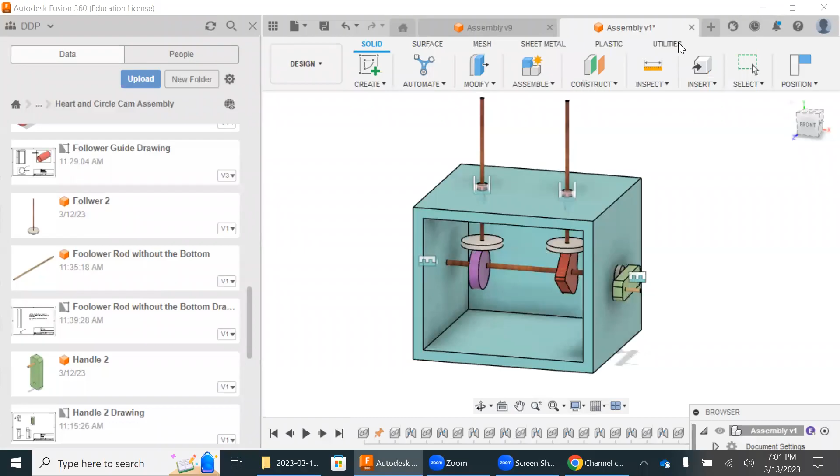Hello DDP students, so we're starting the CAD creation of our Automata box. This is the end result, this is my specific design, not yours, so yours is going to look different.

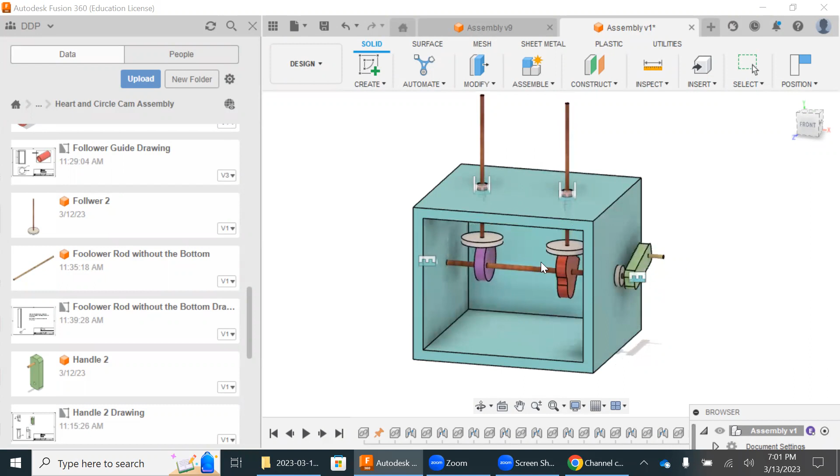The box itself is going to be unique to the physical box that you get in class. The handle, the rod, and the follower rods will mostly be the same, but there's going to be variations in your design. The bottom of the followers, maybe you want it square. We're going to be cutting it out of foam core, so I imagine it's either going to be round or square or something similar to this.

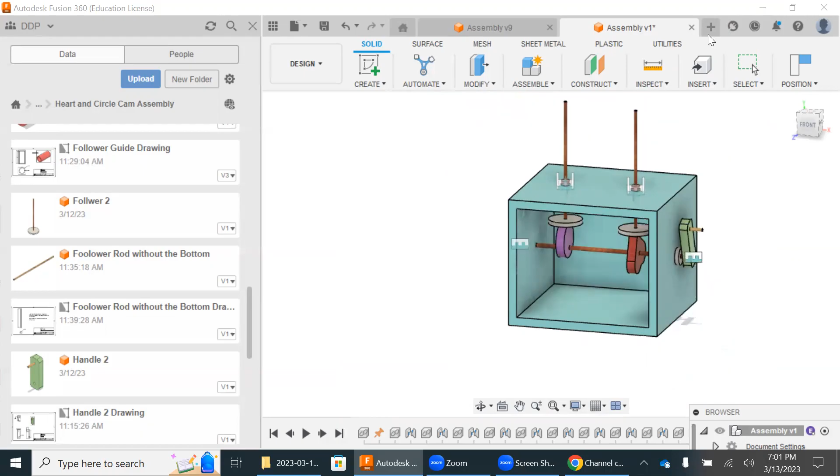But this lesson tutorial is going to be all about going through a couple of the parts and just assembling them. So when we do a part, we start a new design, we want to start it with a new component. We want to name the component. It's really important because we need it all right here as separate. We can't have anything in the same design unless it's an assembly design.

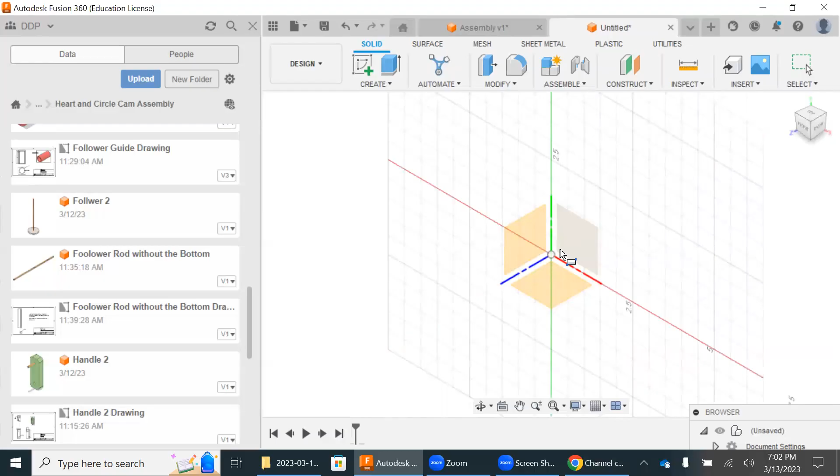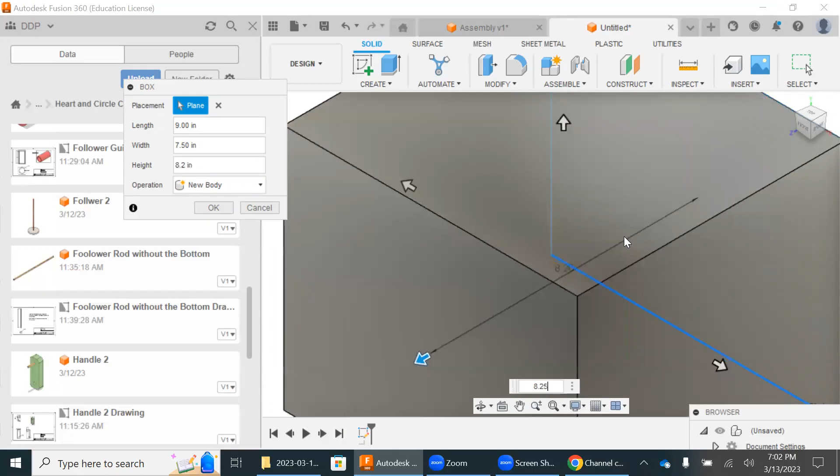So I'm going to start my box as a primitive. The exact dimensions of this is going to depend on the exact dimensions of your own personal box that you get in class. This I'm just making up, don't pay any attention to the dimensions, that's not what this is about.

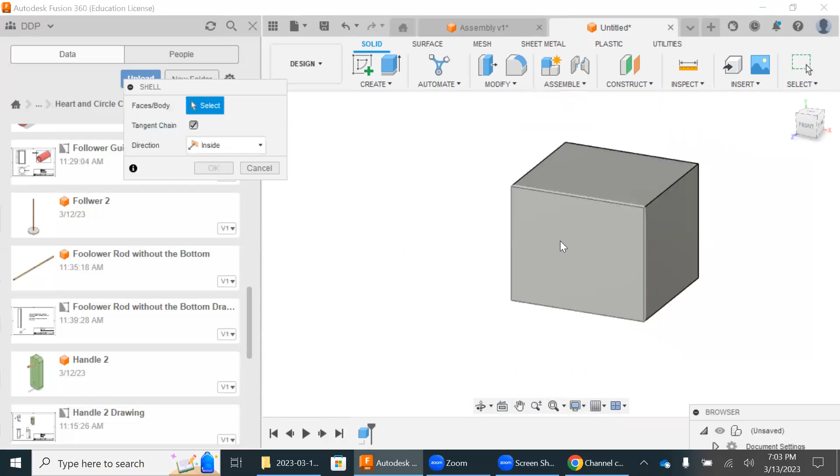But what we do want to pay attention to is that the front of the box is the front of the cube, and when we're looking at this it's going to be lined up. So what we want to do to the front of the box, we want to shell it. We're going to go to our shell, choose the front, and I'm going to choose 0.5.

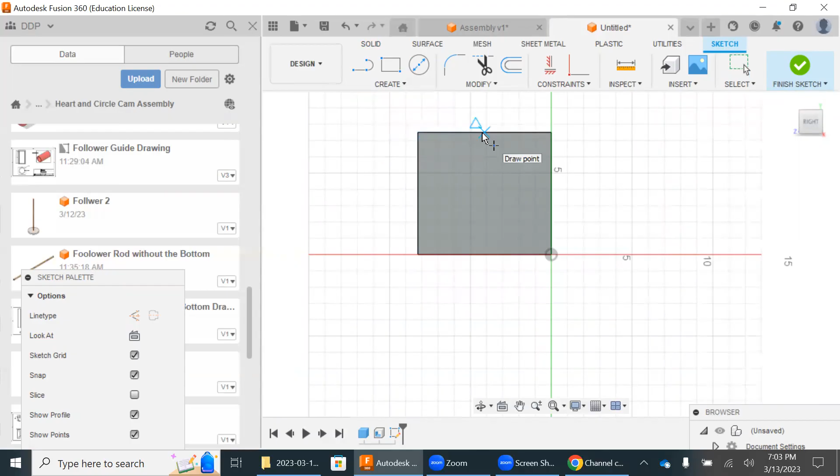Hit OK, and then I'm going to start to sketch some features. I know the axle rod that we're making is going to be 0.25. So I'm going to do my point here, and then that here, then that's the center right there. I'm going to just make a 0.25 circle.

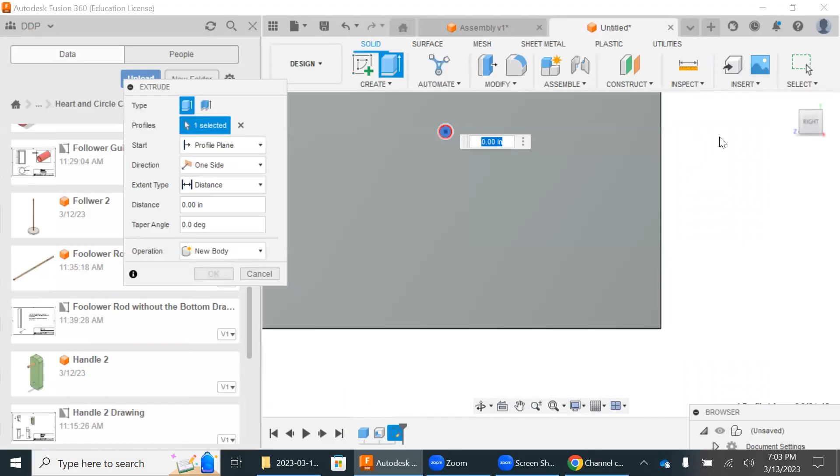I'm going to zoom in, finish the sketch, and we're going to extrude that inwards. But what we want to do is we want to change the distance to all, so it goes all the way through the box. Okay, and then we'll just hit OK. And now that's lined up, both sides are lined up, right?

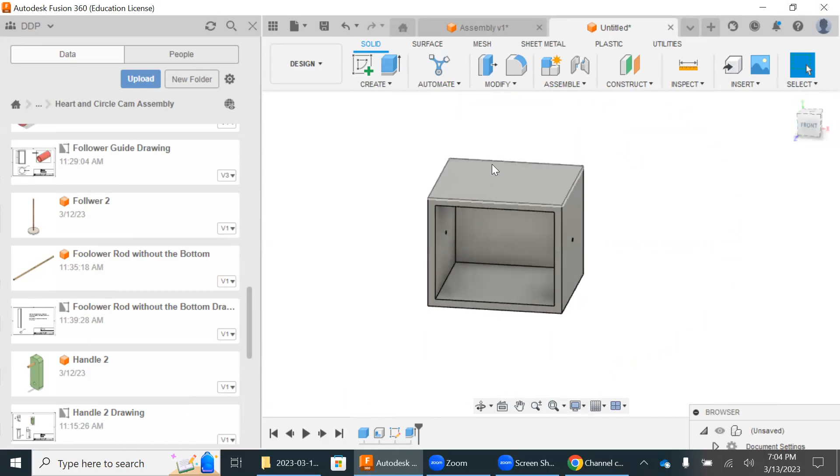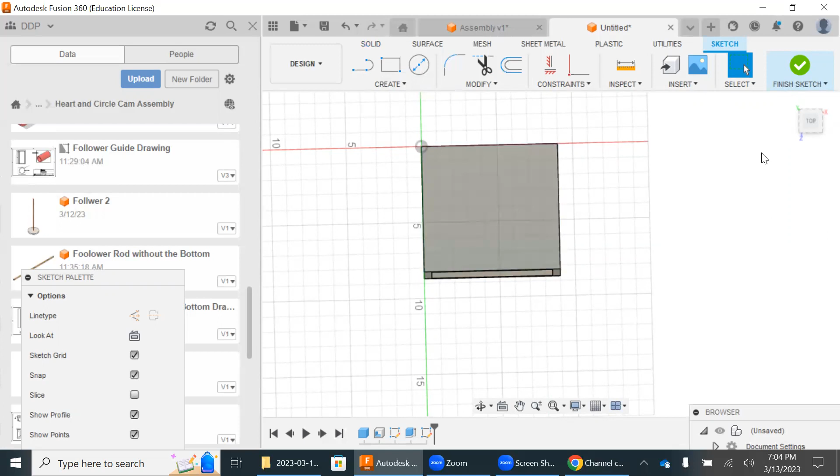So now what you should have done by now is you should have planned how many followers you want, how many cams. And given the dimensions of this, the longest side should be the top and the bottom, the front face and the back. So given that, you should have placed where your holes are going to be given those dimensions. If there's two, you want things evenly spaced out. However, you also want to calculate how big the cams are going to be, so when we're placing the holes we want to make sure the cams have enough room in the box and that they're somewhat equally spaced along the distance.

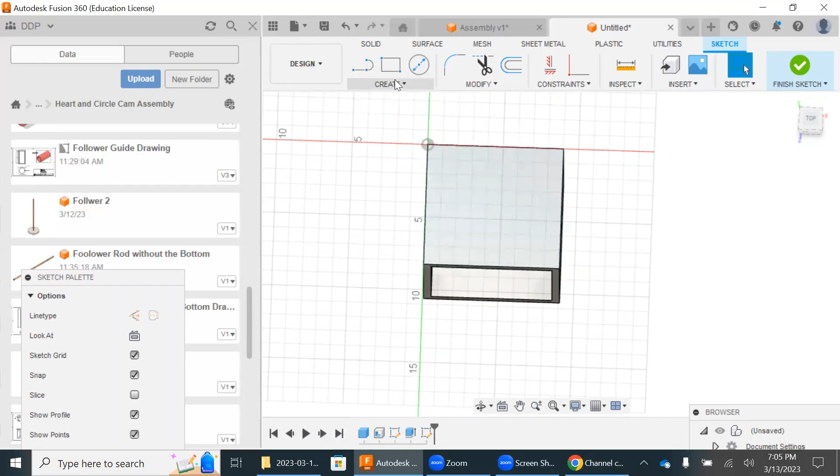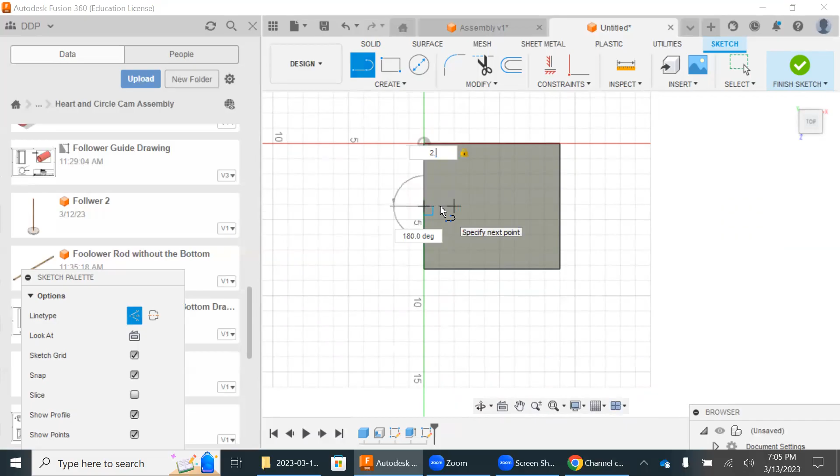So I know that this in particular is a 9 here, but having already worked this out ahead of time, let me just go to my top view. I know where I want my holes already. I'm going to go back to my point, and actually I'm going to go to my line, do my construction line, and I know what the exact distance is for me. Again, this is going to be different for you.

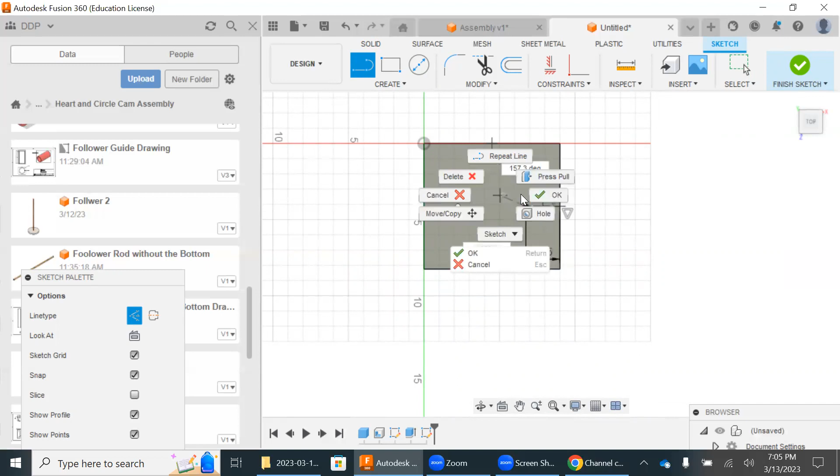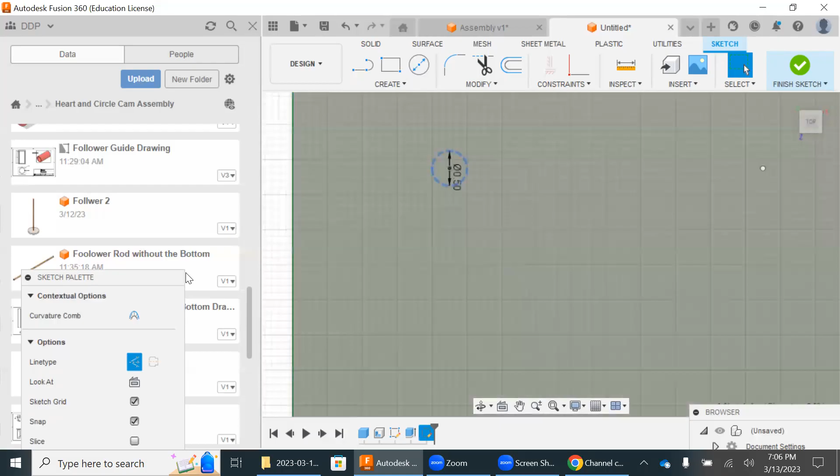Okay, I'm going to place my point there. I can get rid of that line now. I'm going to go back here, find the center point. Okay, I'm going to go here. This, for my design, these are going to be 0.5 circles. But what happened is they're still on the construction, so I'm going to highlight that and take that off. We're going to do the same thing here with construction lines. Then I'm going to finish the sketch and extrude both of these.

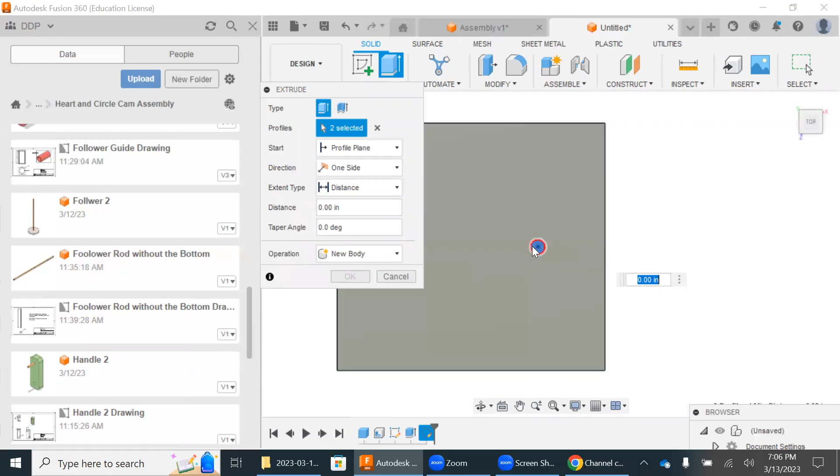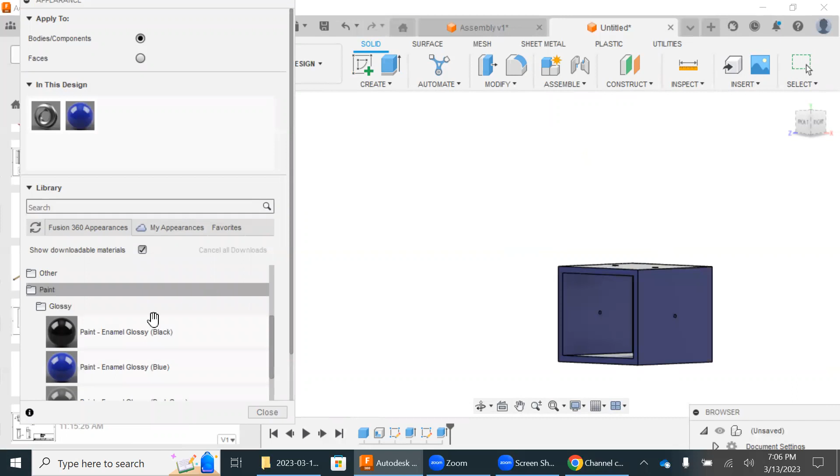And that's how we're going to make our box. And then if you want to give it a custom color, you can. So we're going to save that as box or whatever, and so it's there.

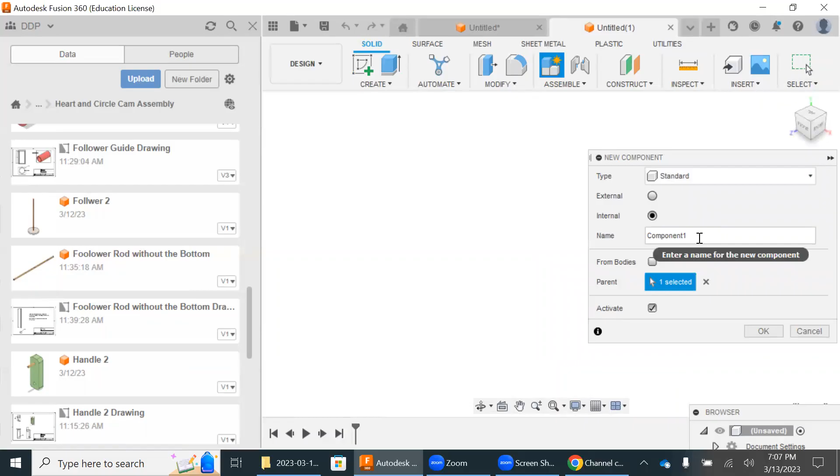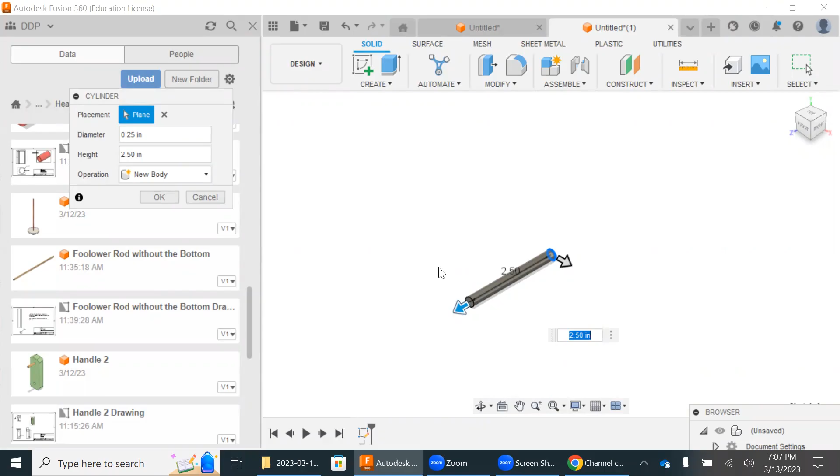All right, I'm just going to move on to my next one, the axle rod, which is going to have a diameter. I'm just going to go with my primitives here. So we know the diameter is going to be 0.25. The length of it, however, is going to be about an inch, inch and a half longer than the longest length of your box. So if mine was 9, then I would make mine, I don't know, 10.25 or 10 and a half, somewhere around there. It doesn't really matter, but it does matter that it's at least an inch and a quarter to an inch and a half longer than your longest side.

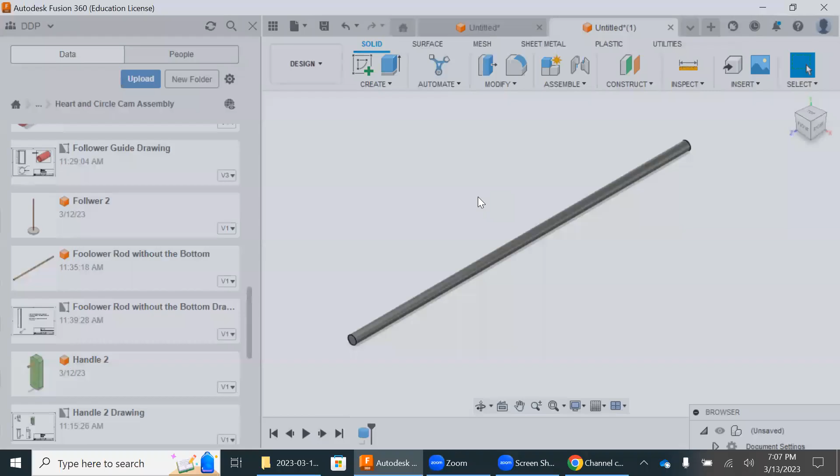So that's easy enough. We're also going to save that as axle rod. Save it, I'm just going to cancel it, but that's the idea. Moving on, our follower rod, we're going to create a new component.

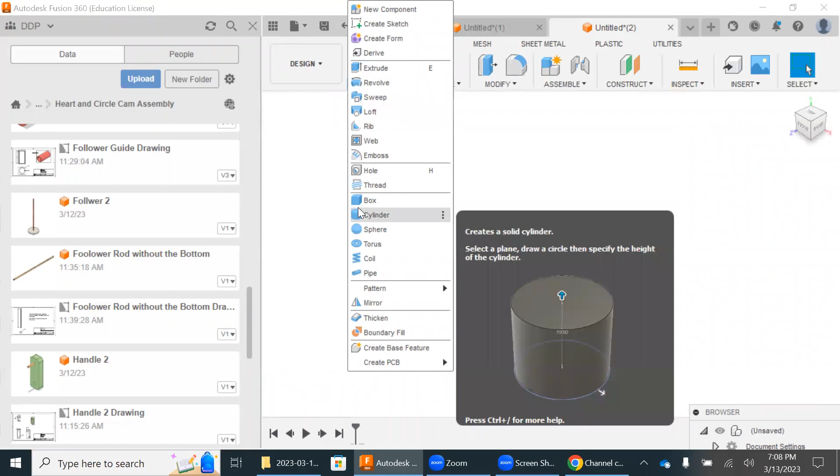This is going to be different. I'm going to do a 0.1875 for the diameter, and for this I'm going to do 7. I'm just making all of the rods, the follower rod, 7.

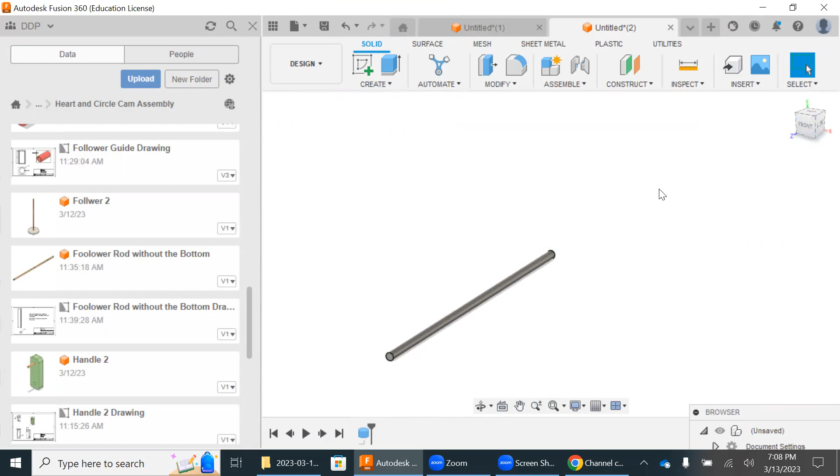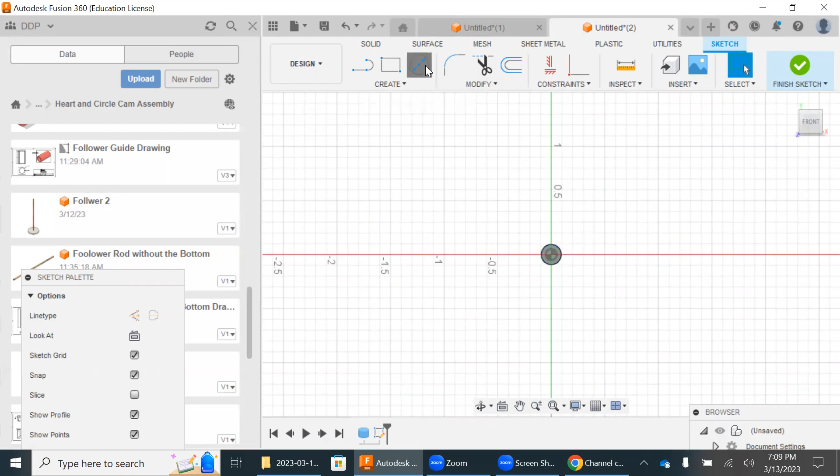Once you do that and you've planned what the bottom looks like, it could be square, rectangle, oval, you want to figure out how wide your follower bottom should be. This has to do with the amount of space that's in your box and how many cams you have. So let's just say you have 5 cams and a very limited amount of space and they're crammed together, you want the diameter of these to be small enough where they all fit.

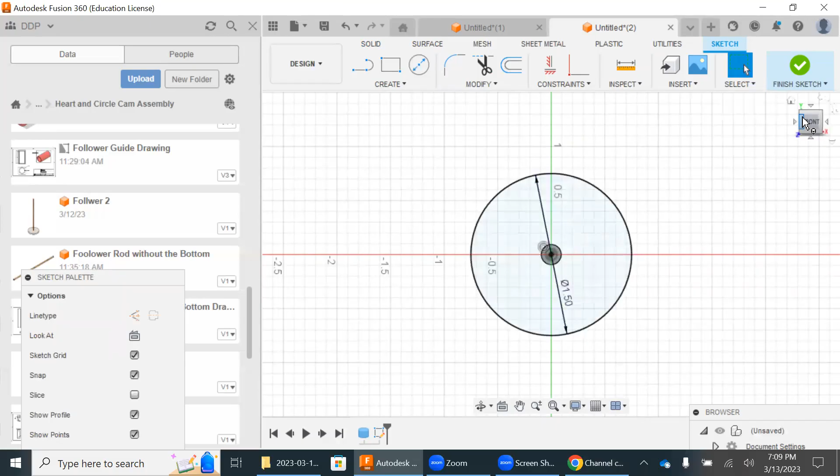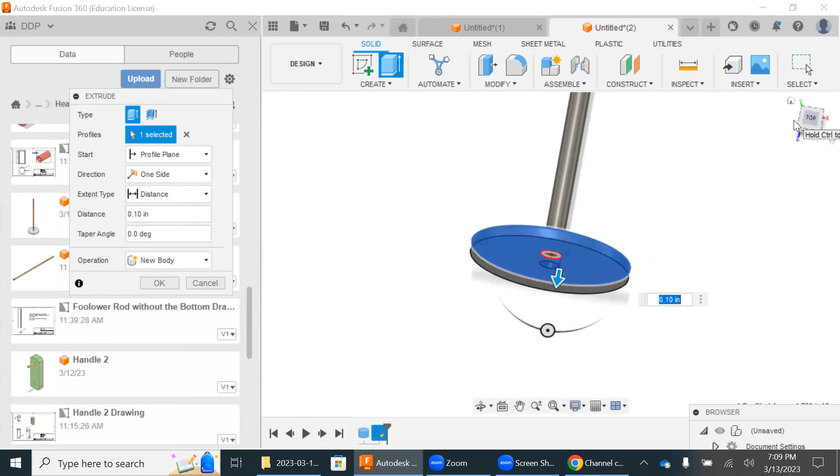However, if you have 2 cams and let's say 9 inches, these could be 2, 3 inches, something like that. Let's just say this is 2-inch—we'll even go 1.5. The bottom of this, I left it without a bottom in the instructions because you need to figure out the diameter of the bottom of the follower. Once you have the diameter figured out, we can extrude that down. I'm going to do a 0.10.

Now, if we want to change the physical appearance, let's see what we got here. There's something I'm going to change it to—there's misc here and there's paper. I like that for this. Then I'm going to close this and go to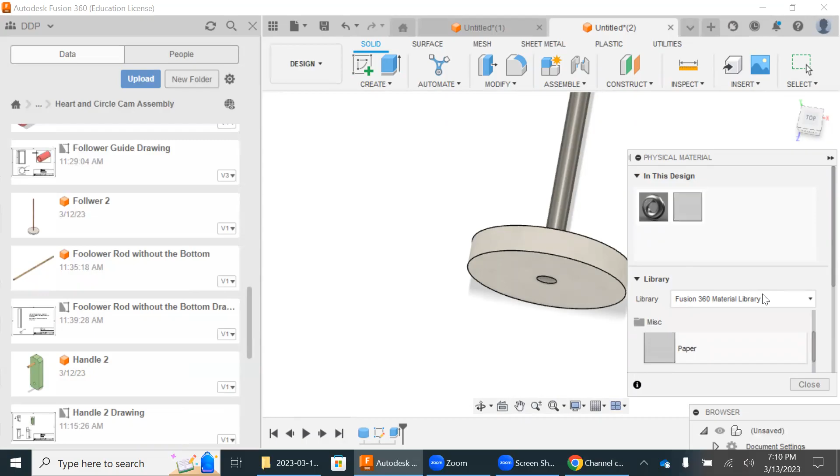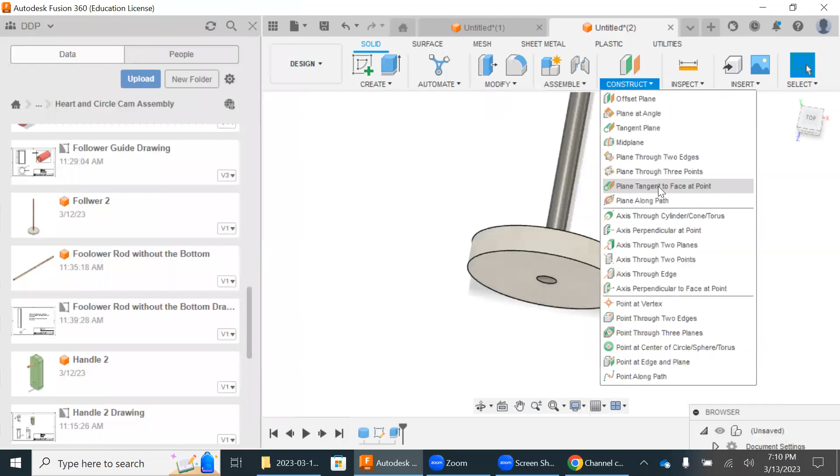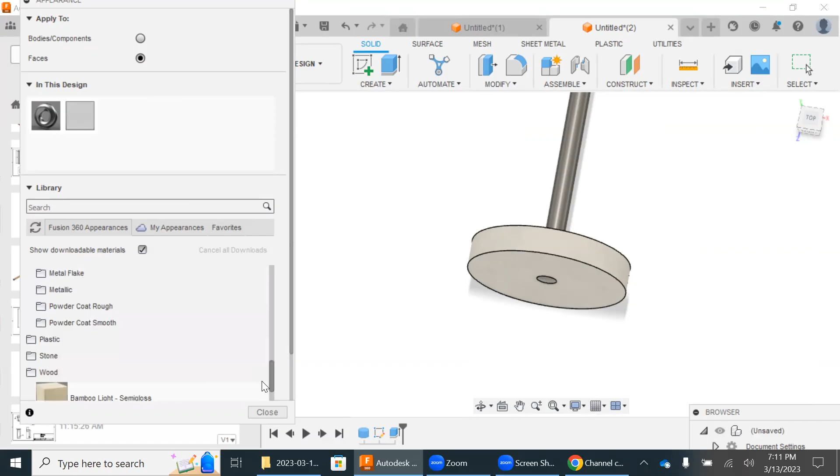I think it's appearance. Here I'm going to find my wood. The wood in this menu allows you to apply it to faces. Let me see if I can do that up here. I'm going to close this—let me see. Let me see if I can find this real quick. Do physical materials—nope, not that one. We're going to go to appearance again. Okay, faces, this is what we want. Cool, so we're going to find our wood and we'll just throw this on there.

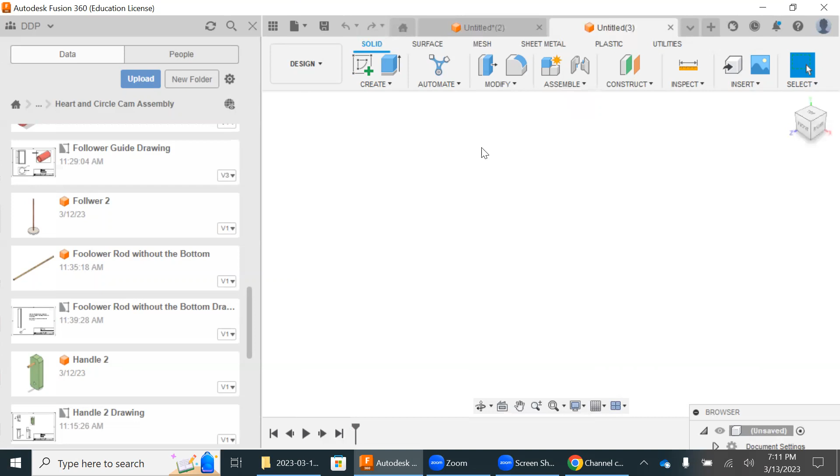Good enough, so we're going to save that as our follower. Cancel that to start a new design. So our handle here, we're going to start a new component—we'll call it crank or handle, or whatever. We're going to hit OK. I'm going to create—I'm going to start this as a sketch.

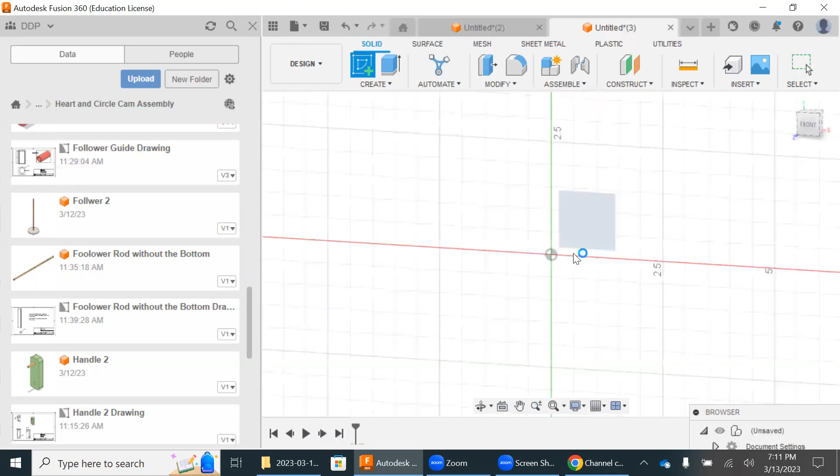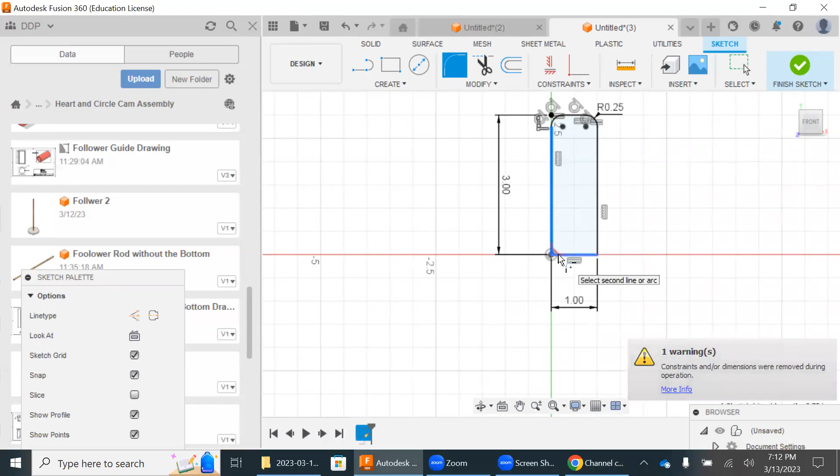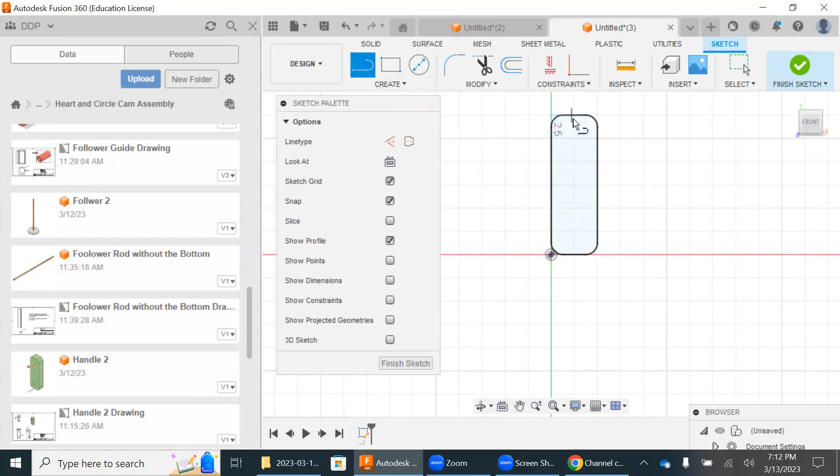I'm going to do a 3x1. Then I'm going to go to my fillet, I'm going to do 0.25, do each of these. Let me get rid of some of this clutter here—constraints, projected points, all that stuff, even get rid of the dimensions. So I'm going to now just go down the center here. I'm going to do a construction line, I'm going to do 0.75 about there.

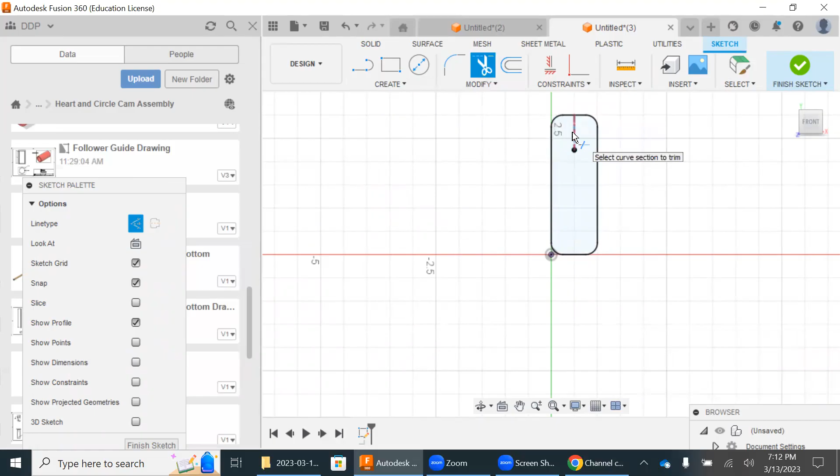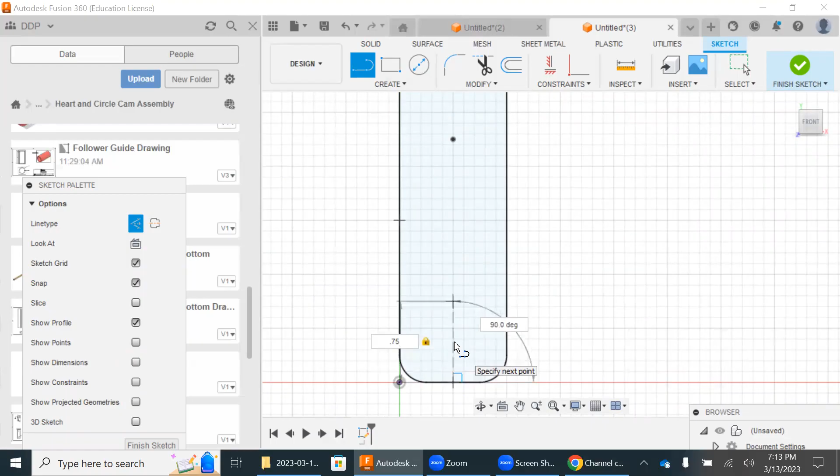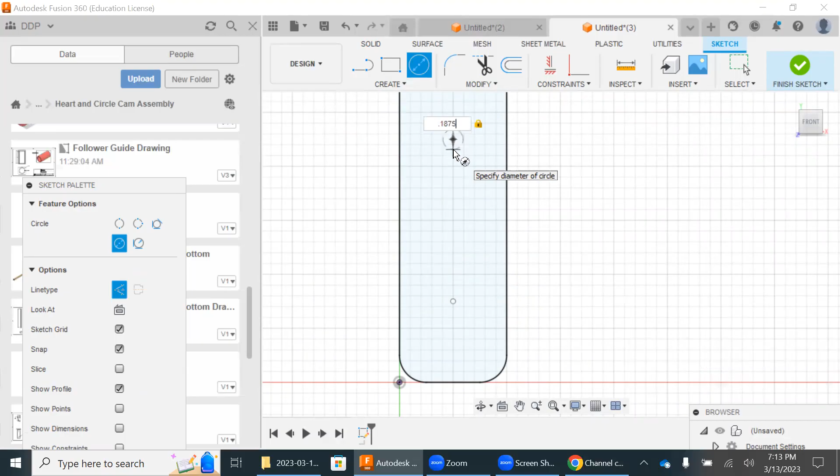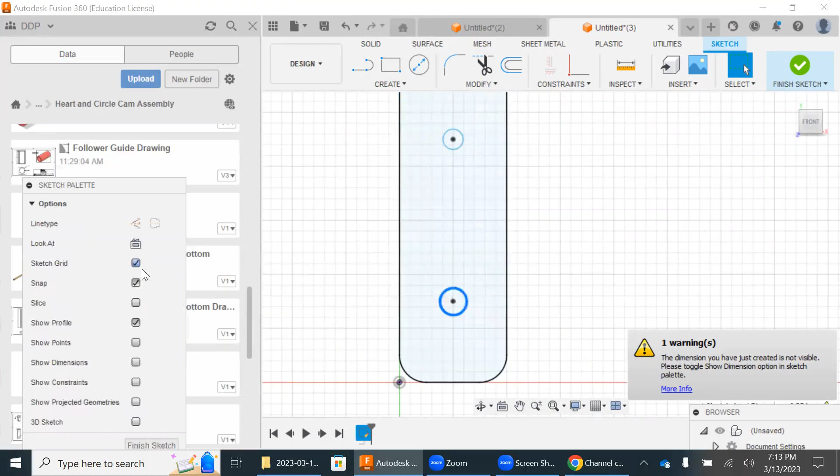I'm going to set a point. This is going to be 0.1875. Then I'm going to do a construction line in the center, 75. Let me make sure I did a hole here—okay cool, there it is. But we're going to change that from construction to a solid line. Now this is going to be the diameter of the axle rod. Now let's finish sketch, extrude this, and I want the handle, just like the cams, to be 0.5.

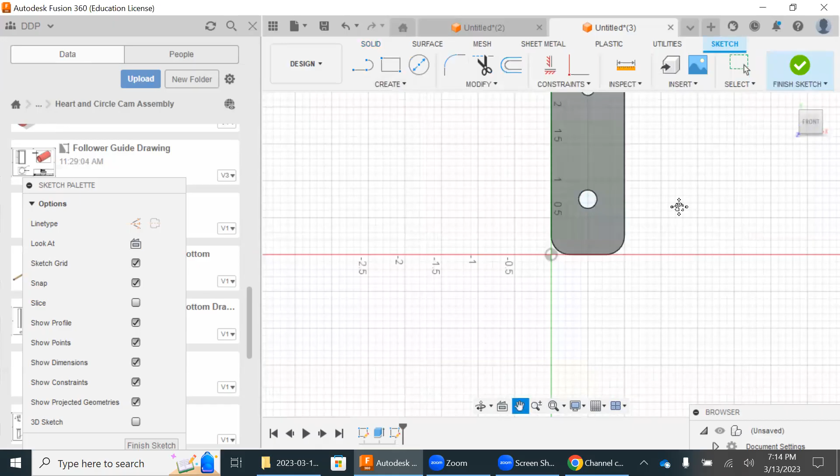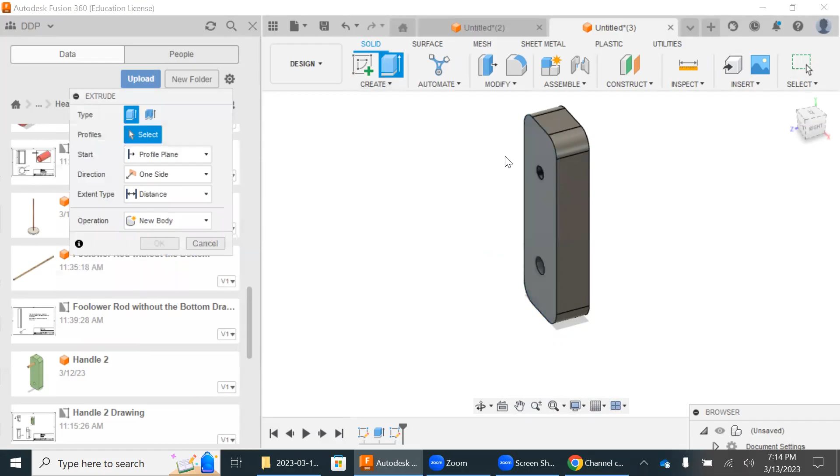Now we're going to start a sketch on this face. Point 1875. Oops, that's not what I wanted, I'm just going to cancel that. And I think this should go out 75. Cool, and that's how we make our handle.

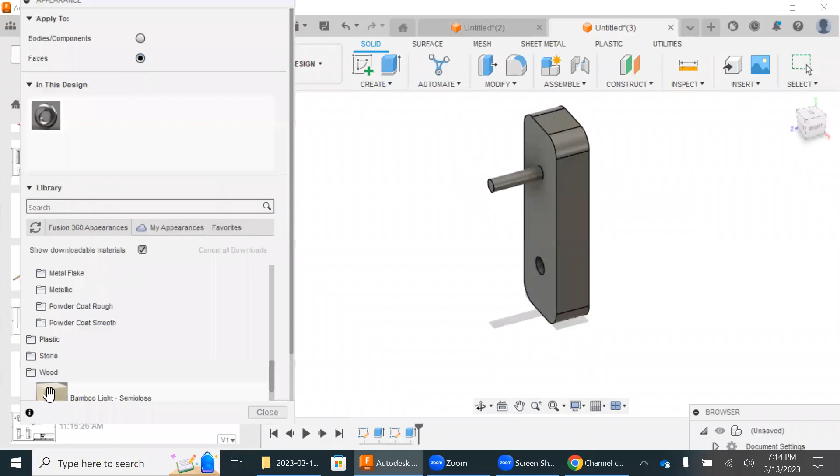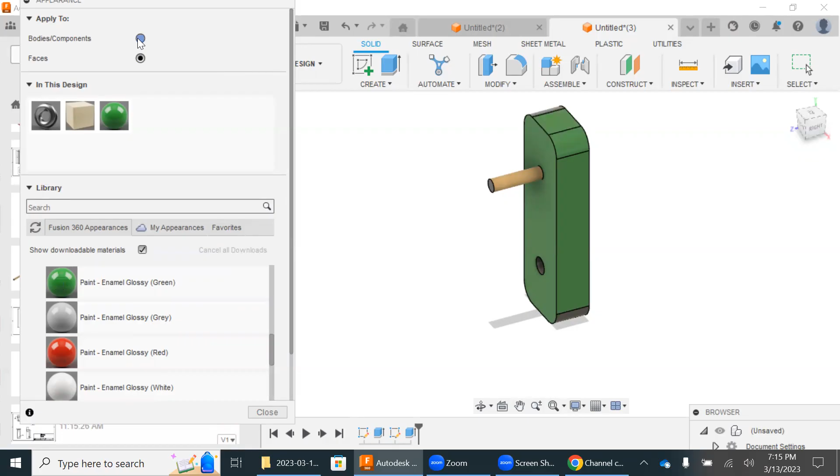Okay, and then we're going to just change the appearance of that. I want this to be—yeah, we'll just do it on everything here. Let's just see if I can just put it to this. Okay, there we go. Cool, so then we're going to save that as handle.

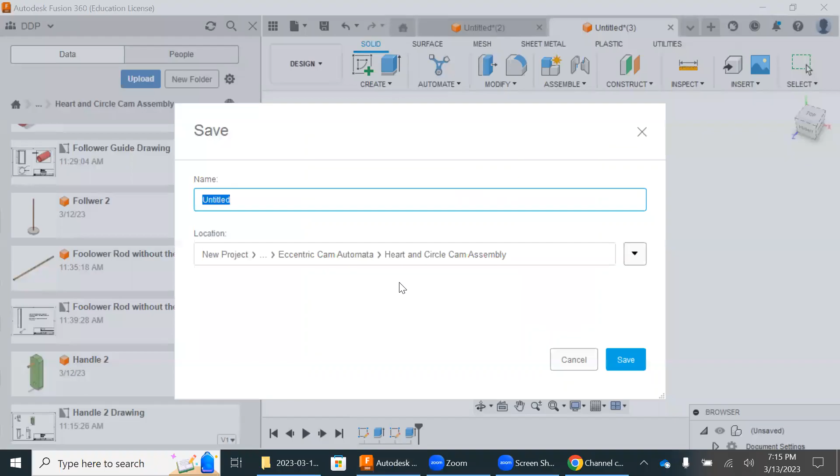The cams you're going to create parametrically, and there are videos for that—I'm not going to show you that in this video, that's a whole other thing. So, with the follower guide, let's just do that—this will be the last thing I do. The cams you're going to do on your own and you're going to model them parametrically. So for the follower guide, we're going to create a new component. We'll call it follower guide. Oh, there's also the other thing.

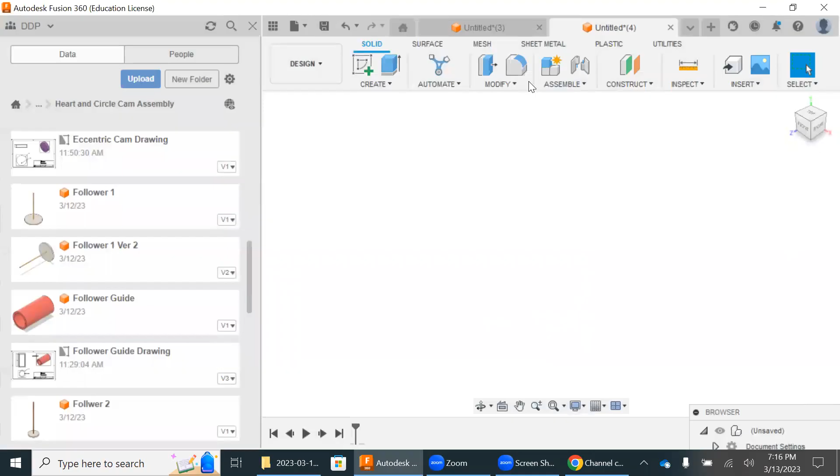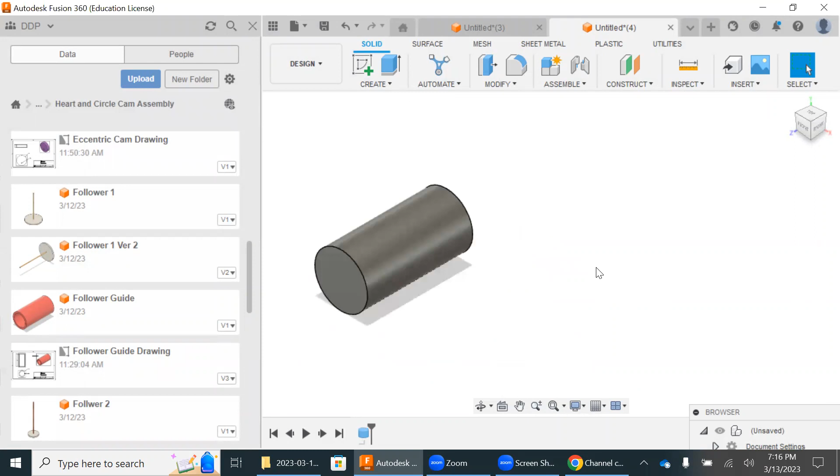We can do a cylinder where this is going to be 0.5, and then this is going to be 1. And then we're just going to show this. We do a 0.1—oops, let's do a 0.01.

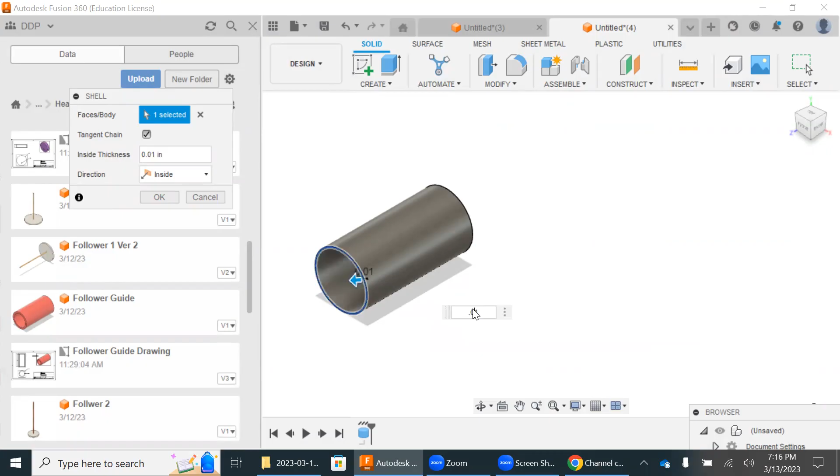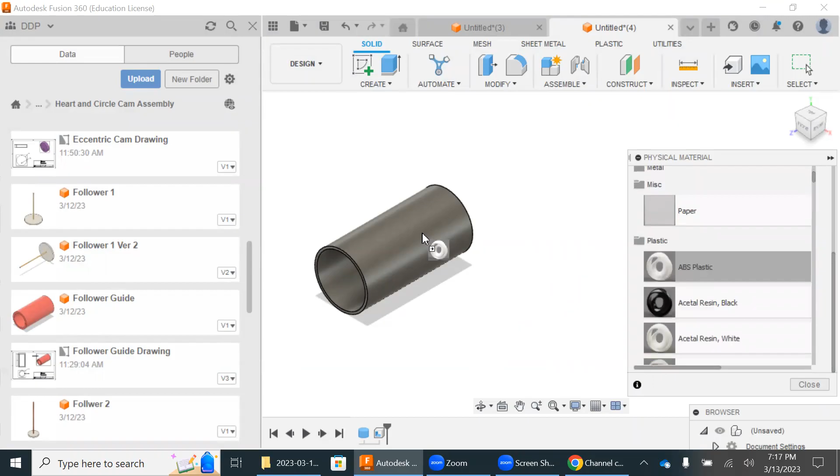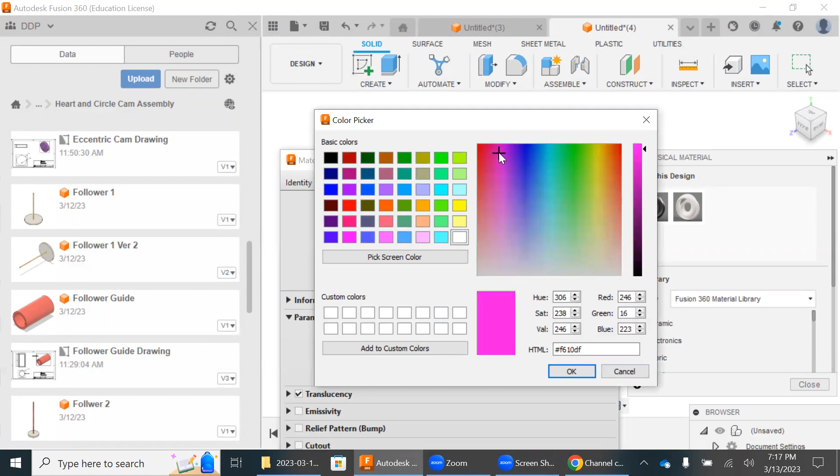Now what we're going to do is we're going to change the material to plastic, so let's find plastic. And if you want, you can even change the color of this as well—let's just say we want it like that. Cool. Oh, it didn't even change, let's see what's up with that. I must have hit cancel. Let's make sure it's working. Right, and that's that—you're going to save that as follower guide.

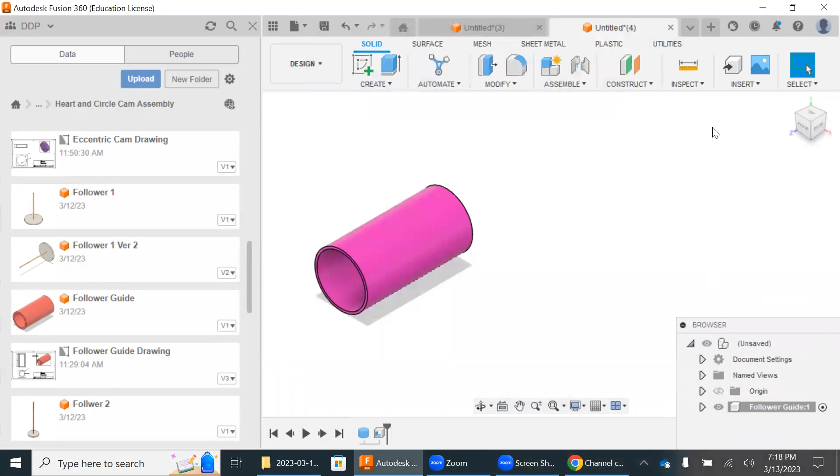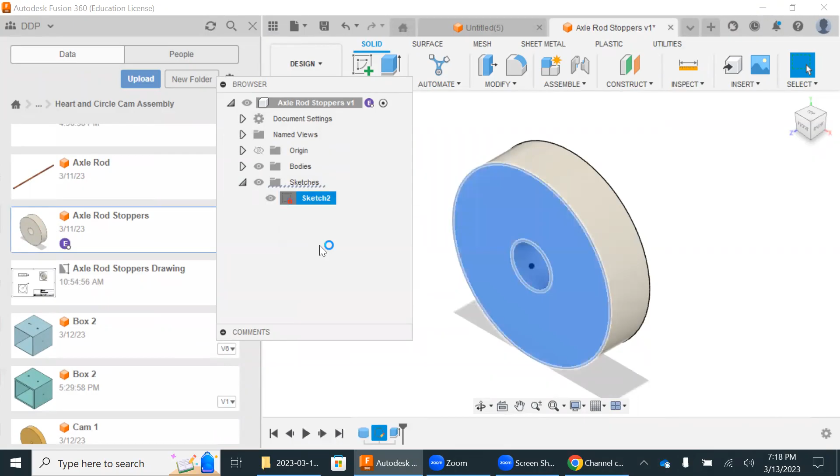Okay, cancel, do a new design. And then the last thing is the axle rod stopper. Let's just take a look at the sketch here. And then we don't need to make that. Okay, so let's just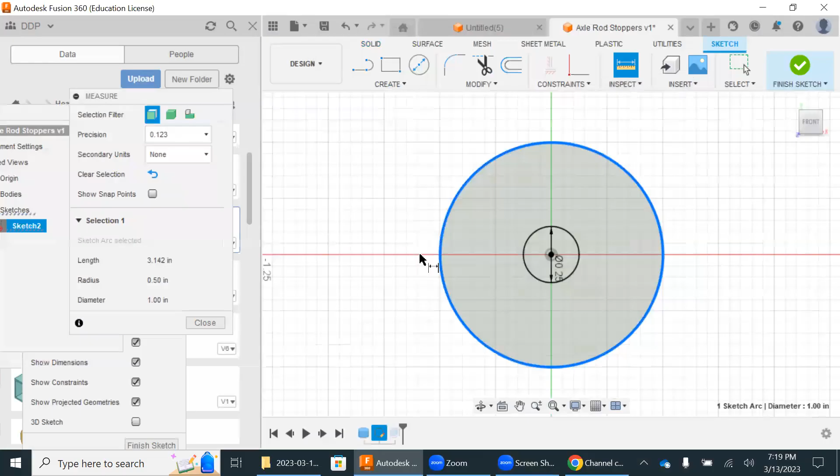put 1, and then this is 0.25. This is going to go on the axle rod. So this is a 1-inch diameter, 0.25 because it goes on the axle rod, and it's going to be extruded 0.25. All right, that is it.

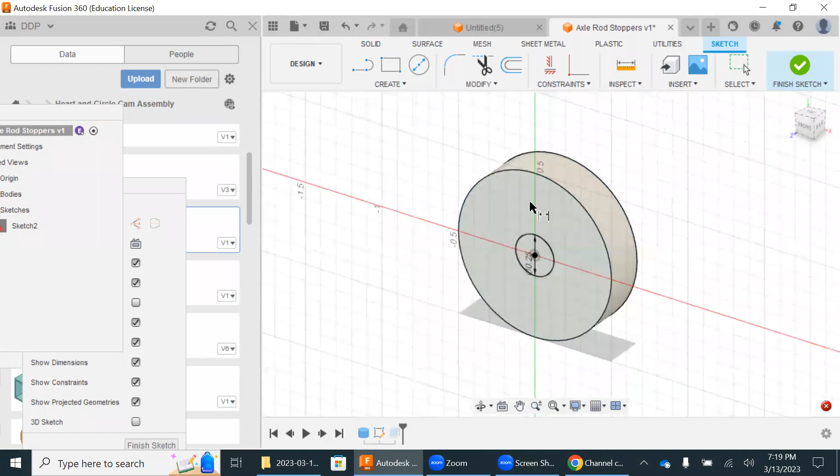The cams themselves you're going to create each cam parametrically, and you're going to follow the videos in addition to the technical drawings on the assignment itself. All right, thank you.